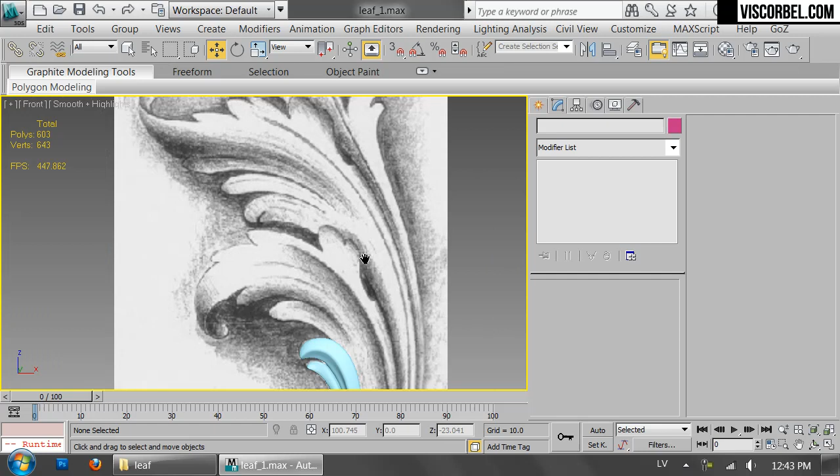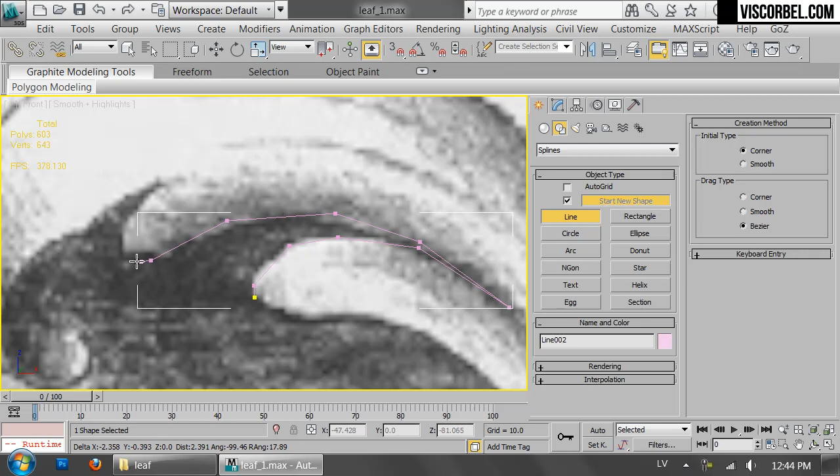Alright, so let's make another leaf, and this time let's make it a bit more complicated. And I'm gonna use the second leaf from the same drawing. Again, I'm gonna begin by outlining with the line tool. Okay, here I'm gonna trace it like this.

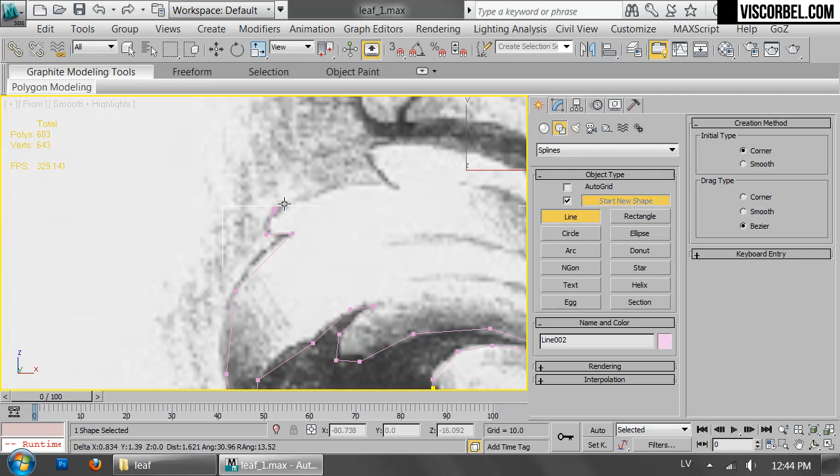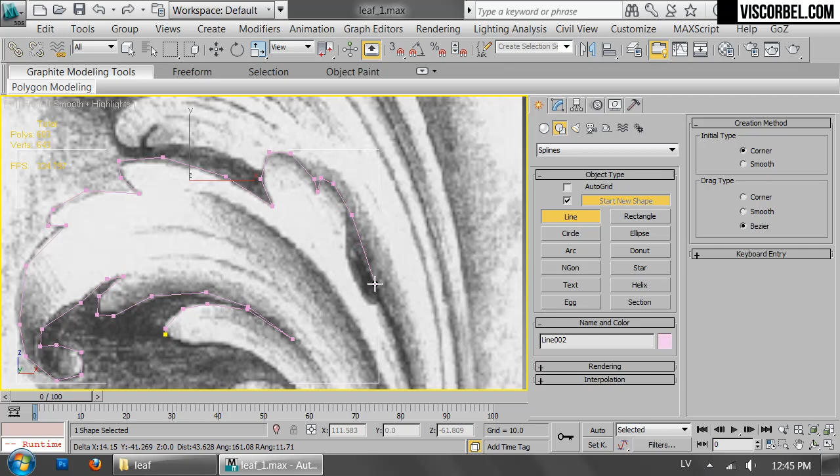Okay, just quickly go over the overall shape. I'm gonna slightly modify it over here. I'm not gonna make such a deep cut. And just a few more.

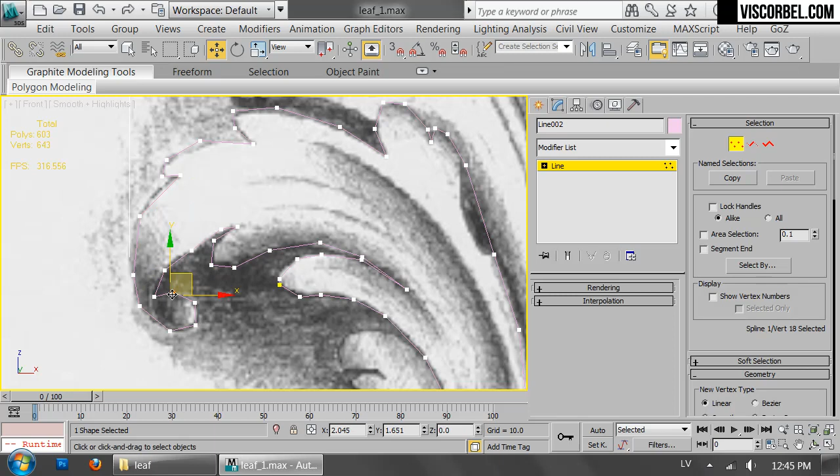Okay, just tweaking the shape to make sure it's nice and smooth. Okay, maybe let's make this part a bit thicker. Like that.

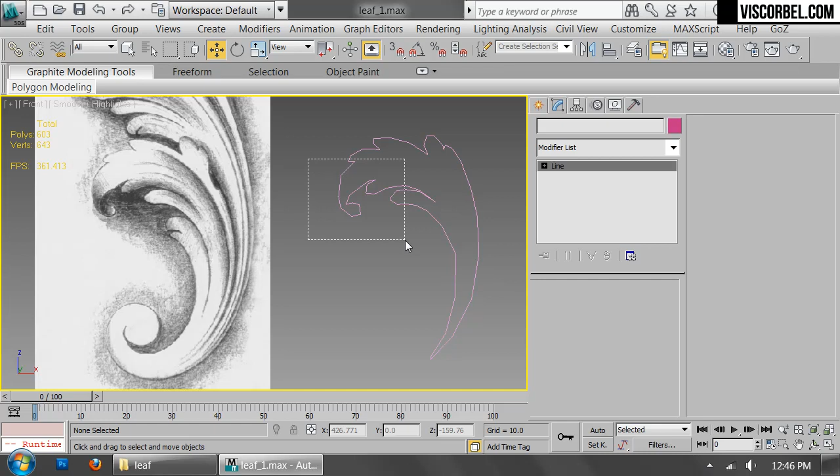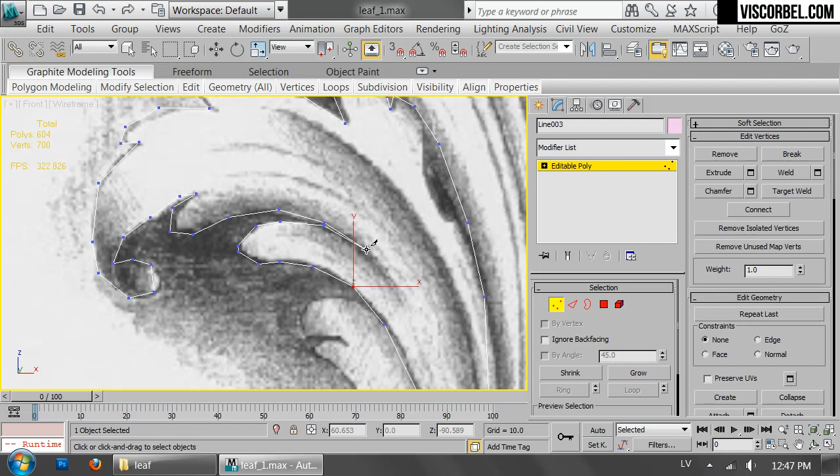Alright, and now we're gonna add the main lines with the cut tool. First, make sure everything is set to corner, collapse to editable poly. And now let's use the cut tool to add in the main lines. The main lines usually follow the major features of the object you're trying to model. So in this case, they follow this curved shape of the leaf.

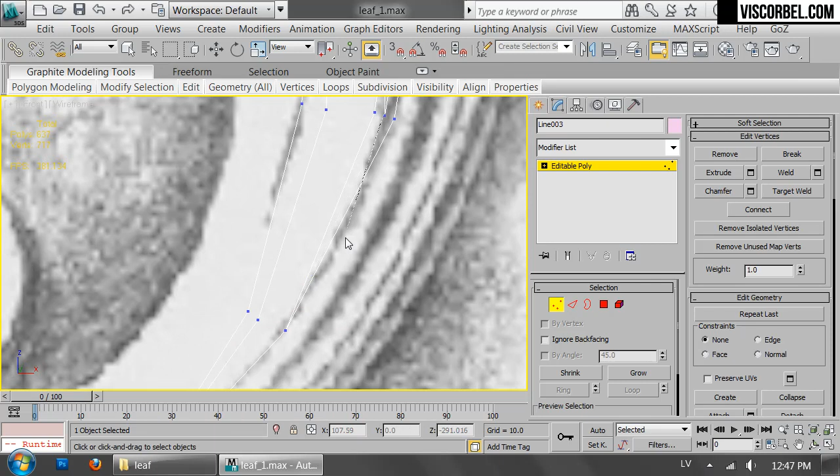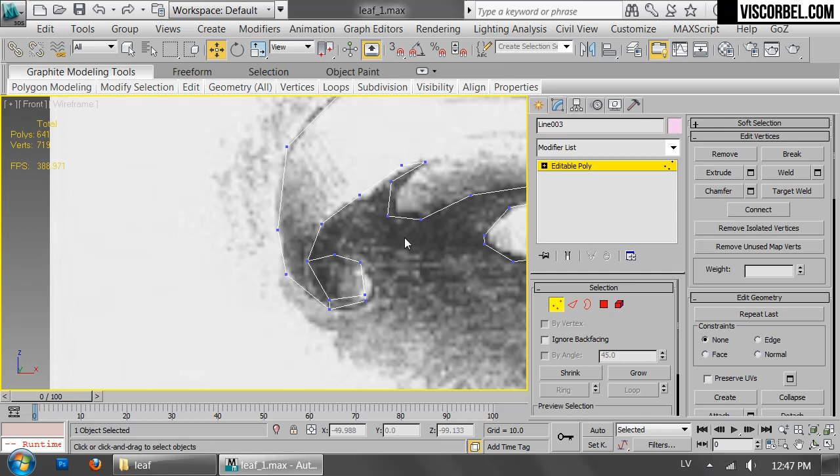Okay. Let's connect these two. And let's cut in some more detail.

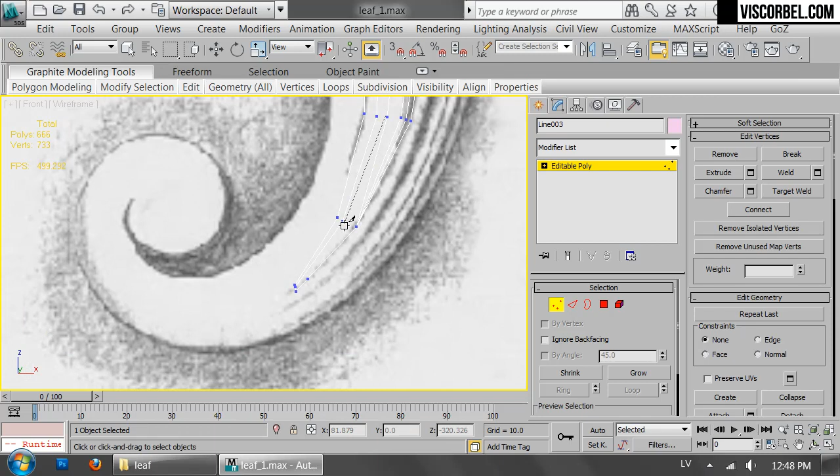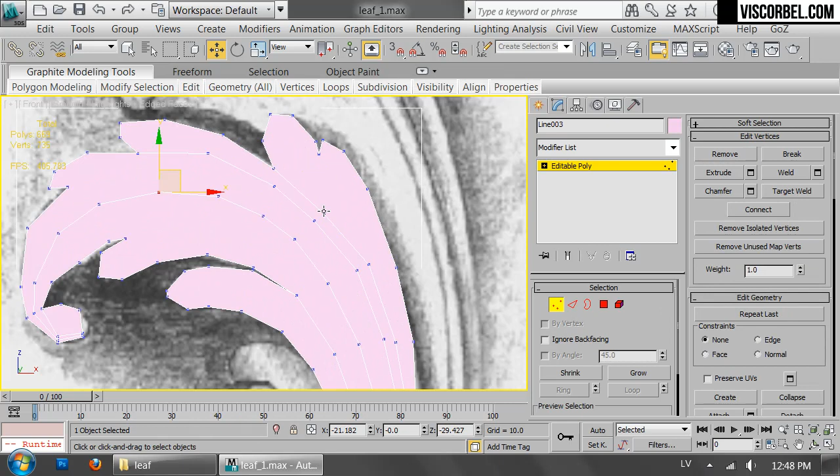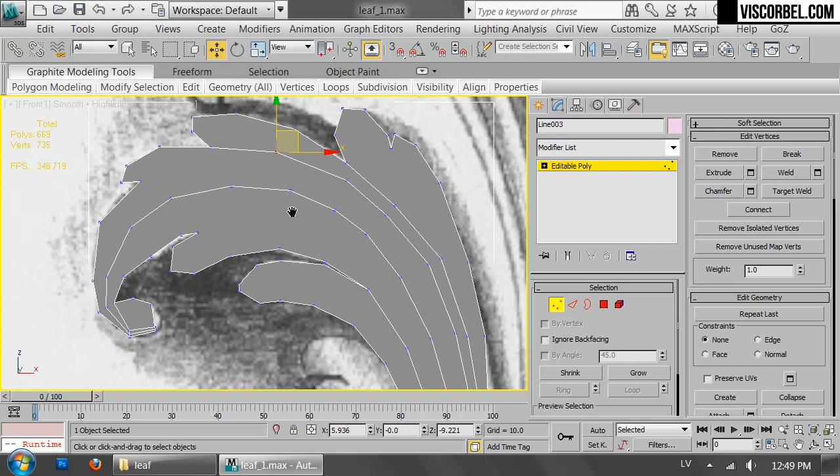The pink color makes it a bit difficult to see the edges, so I'm gonna assign a different material; I like using dark gray. Like this, and I find it's much easier to see where the edges are and the overall grid. Right, let's cut in some more main lines. Let's end this with a triangle.

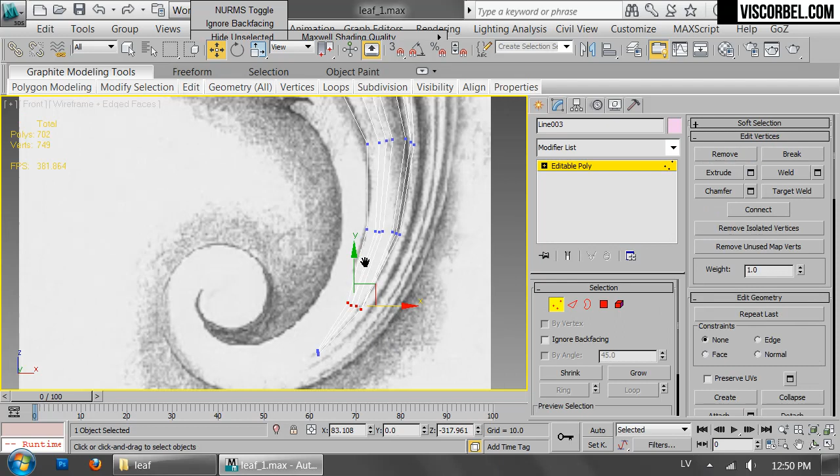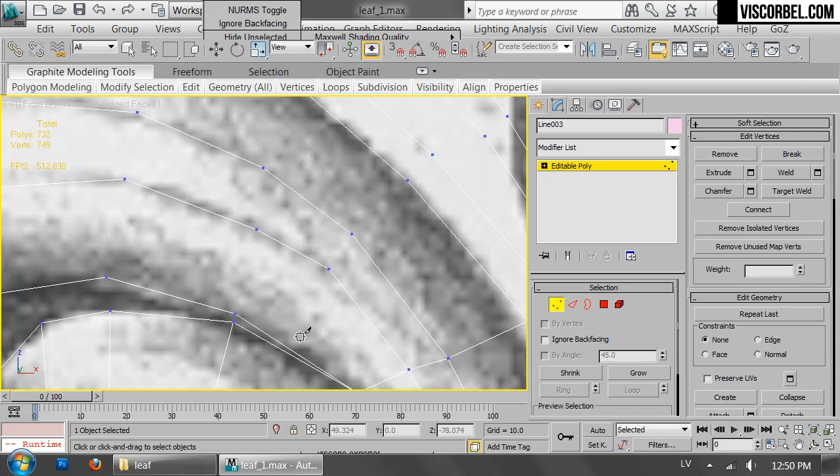Okay, now I'm going to use the connect tool to quickly connect these vertices. I'm just using a shortcut for that now. It's much faster than going through the menu all the time. Okay, looks like we need to cut in one more edge here, just so we have somewhere to complete our edge loop.

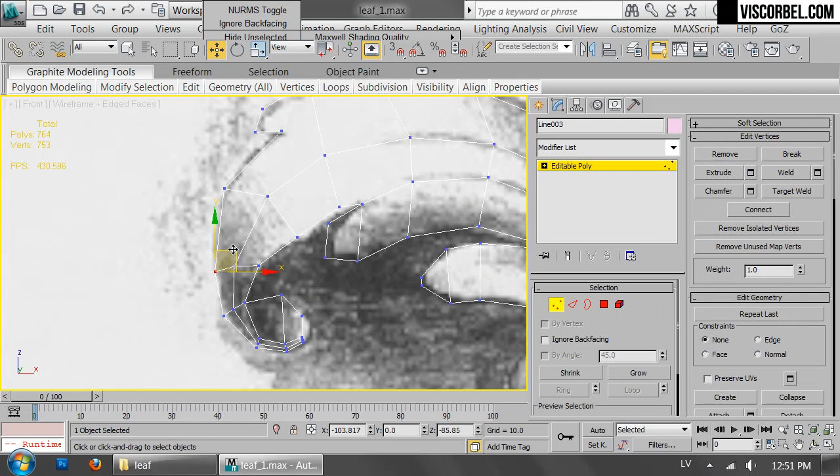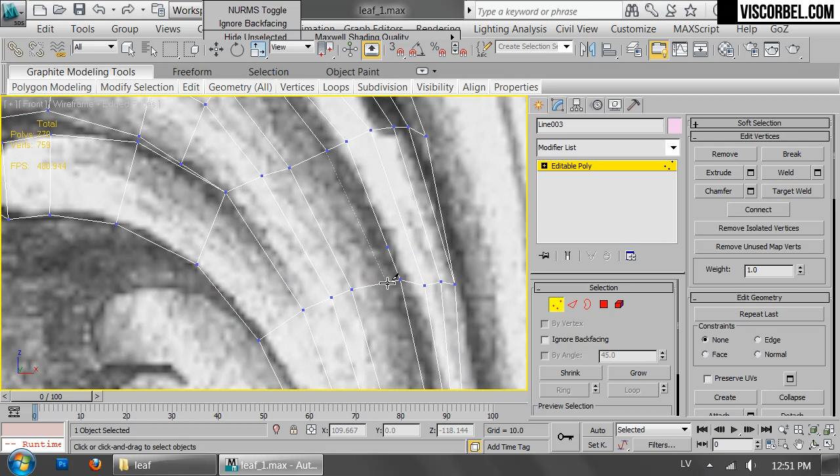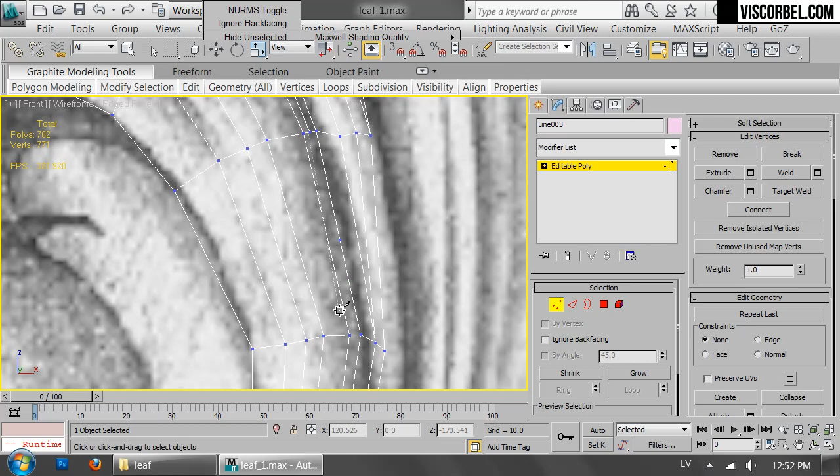All right. Some unfinished parts over here. Let's bring this all the way to the end. And one more cut here.

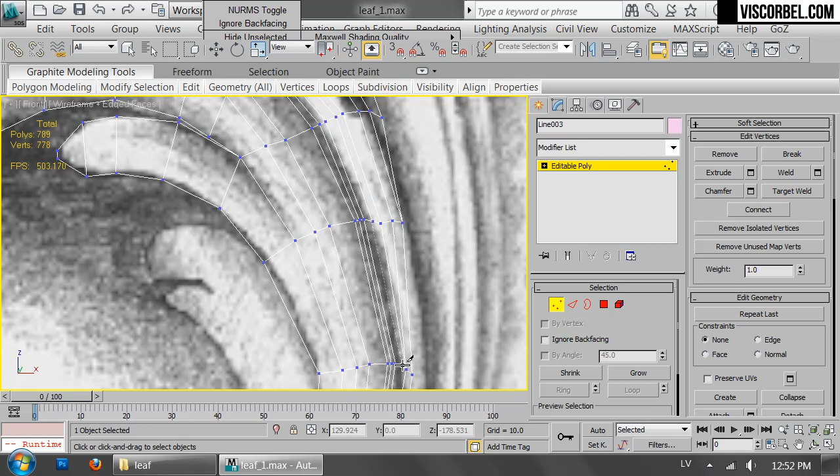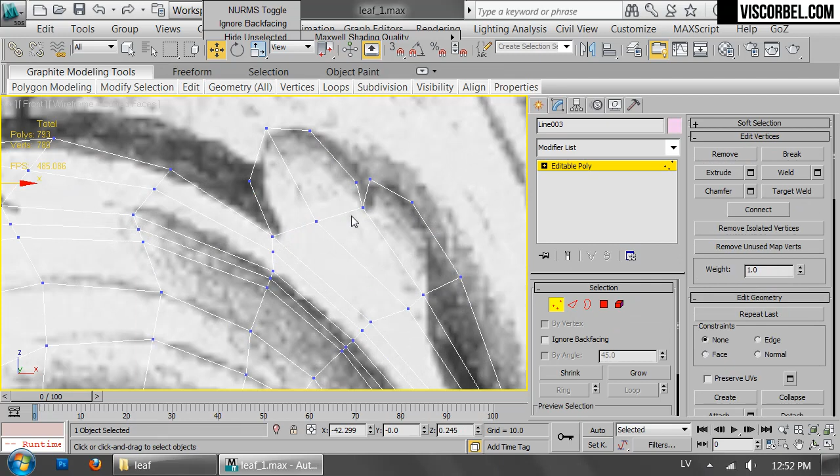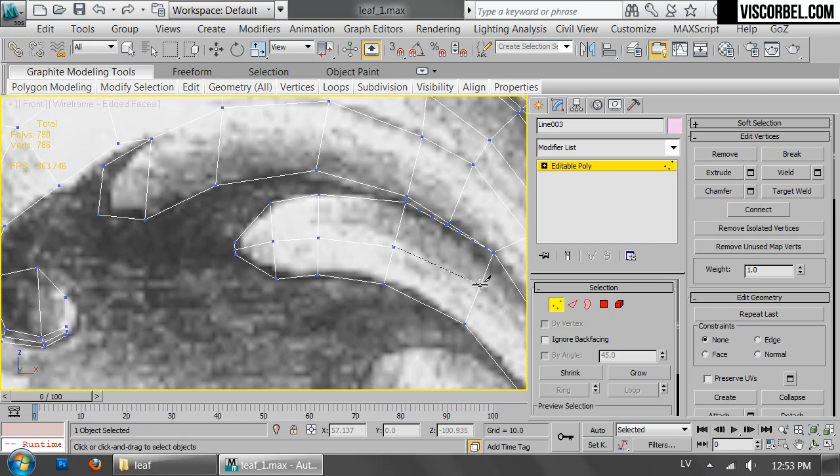And now we can probably start trying to make the shape in 3D. Right, I'm just gonna add one more cut. I want to make sure there's enough detail for creating the 3D shape. If there's not enough edges, it can be quite difficult. Okay, so that's our base mesh.

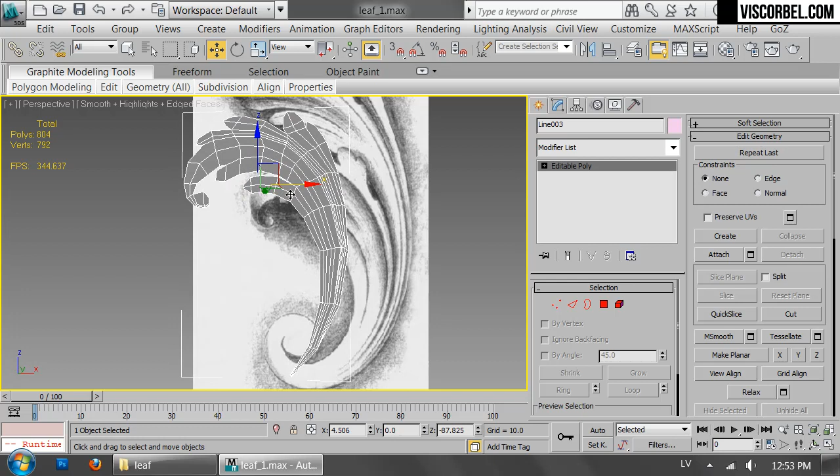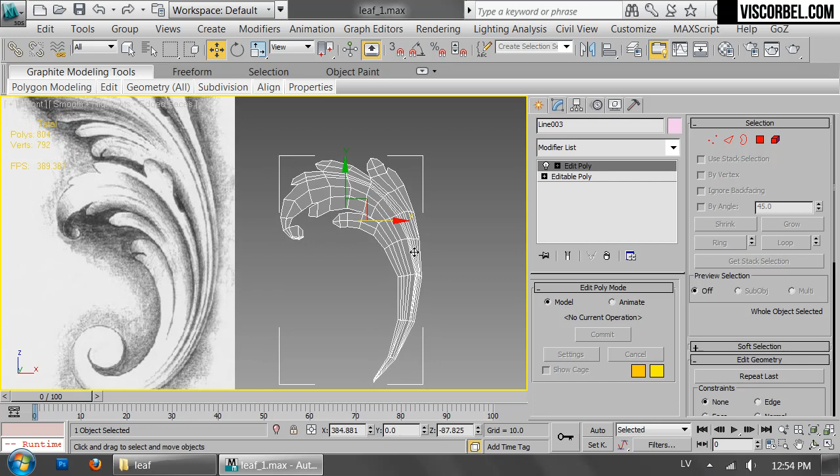I'm gonna edit poly it so I don't mess anything up, and I'm gonna try to modify it. Okay, let's move it out of the way of our reference image. Looks like this part is a bit higher than the rest of the object. So I'm going to try and extrude it out.

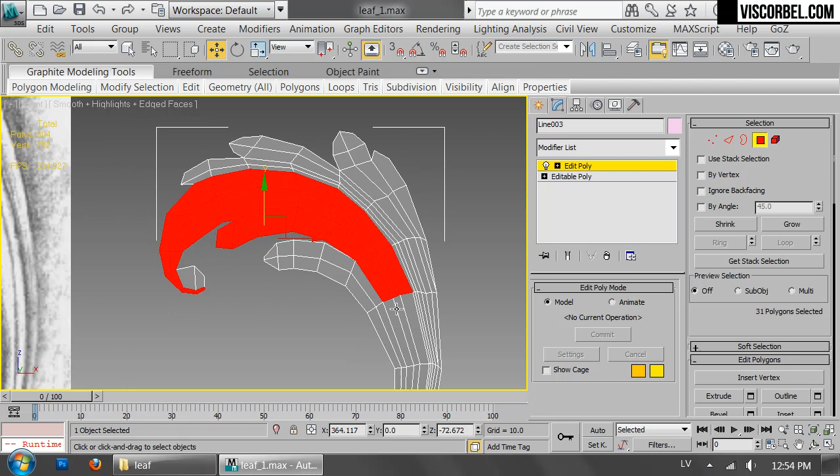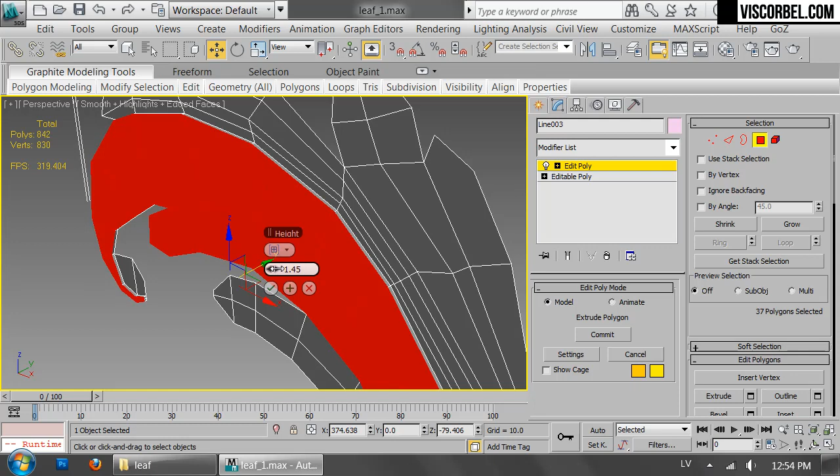Alright, maybe up to this point here, maybe even a bit less. Okay, up to here. So let's extrude it out a bit. Maybe 2 times to make a sharp crease at the start. Make a smoother transition over here at the tip.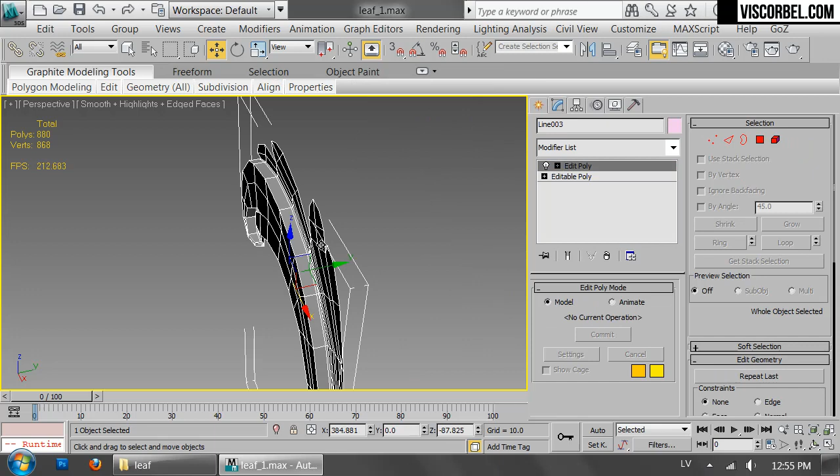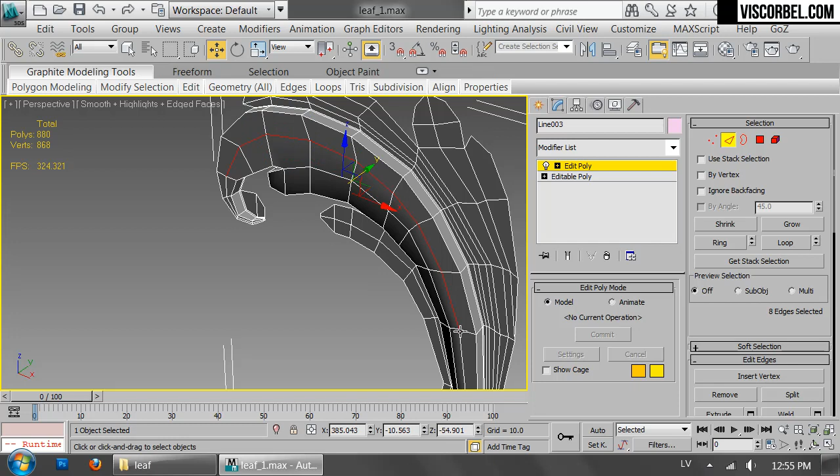And maybe move some of the edges to modify the shape a bit. Let's move these inwards. I'm gonna select this edge loop and I'm gonna move it outwards a bit. So the result is something like this.

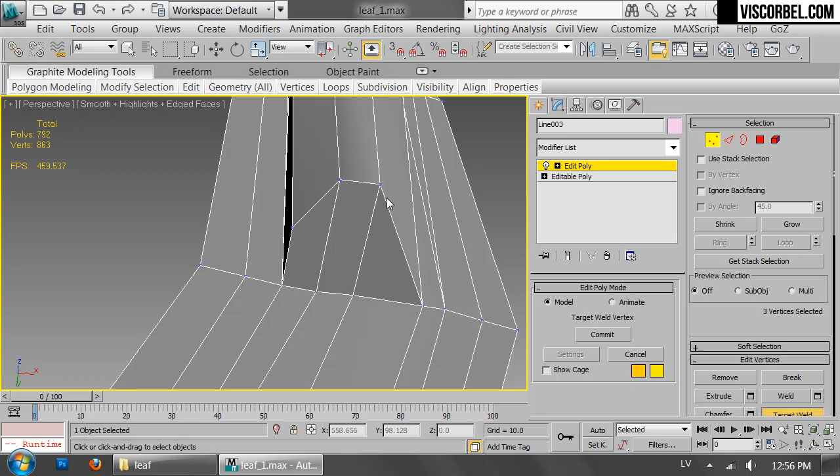Okay, we want to make sure this part ends nice and smooth. So we're gonna target weld all these vertices down here to make the transition to the extruded part very smooth and gradual. Alright. And move these vertices as well, so it's nice and smooth.

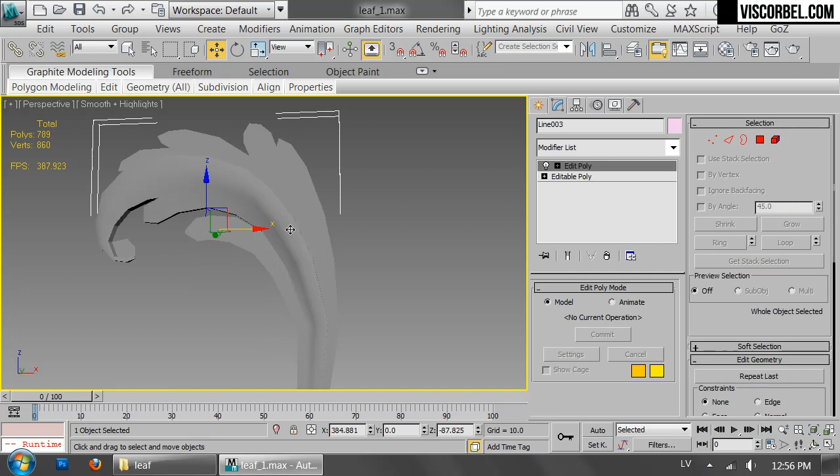Okay, let's add some more detail. I'm gonna move these edges outwards a bit.

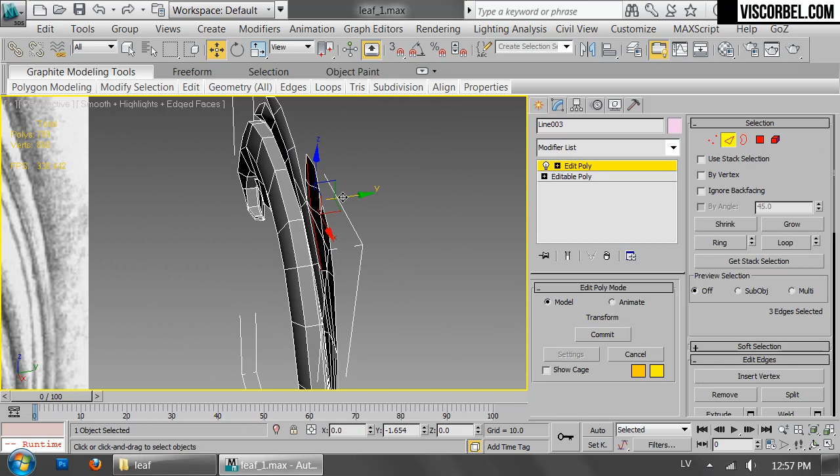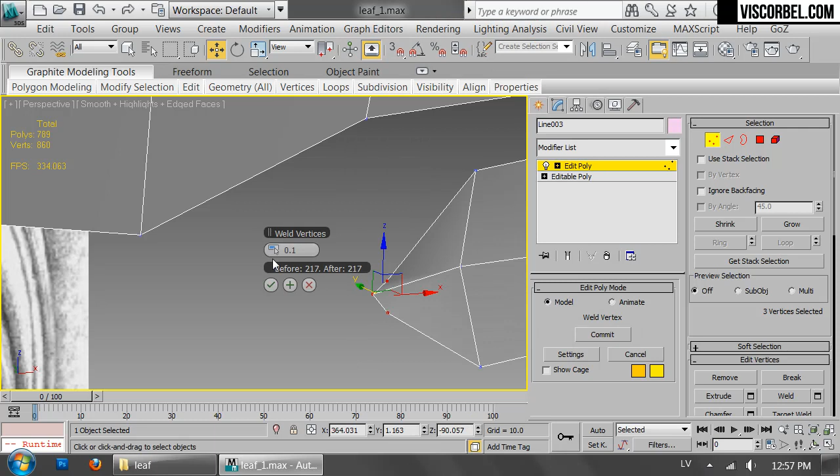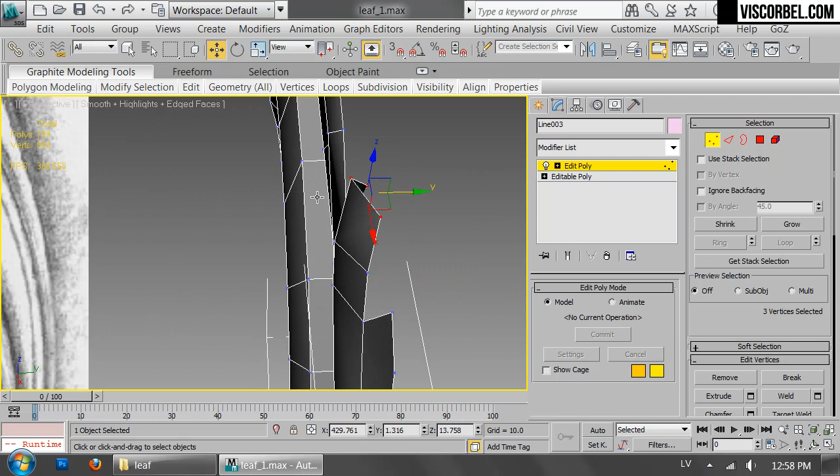And move these ones inwards to make an inwards curve or a concave curve. Actually, I think we can just weld these 3 points together. Okay, let's move these edges back a little bit. I'm trying to make it a bit more 3-dimensional by tweaking the vertices.

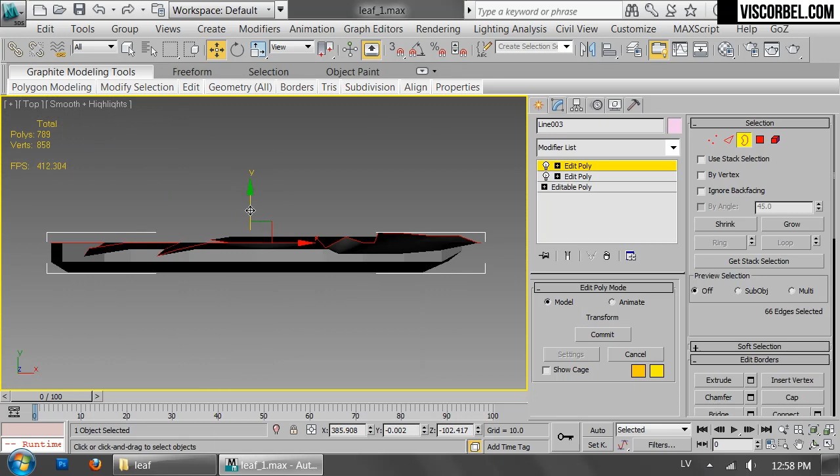Right, I want to see how it looks with Turbo Smooth. So first I'm gonna add another edit poly and extrude the outline backwards. Okay, first a little bit to make this edge a bit sharper, and then a bit more, and flatten it on the y-axis. Turbo Smooth, check the results. It's pretty decent except for this part over here.

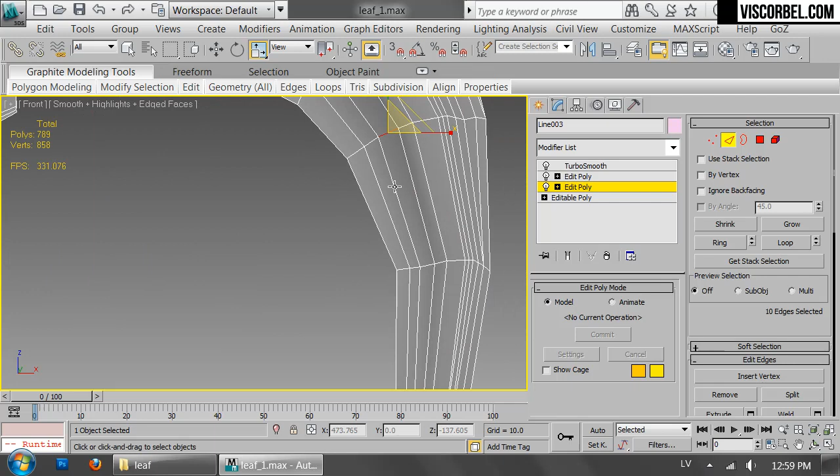Looks like we need to add more detail. And I'm gonna connect and move the resulting edge loop inwards. Maybe sharpen this part a bit by moving some vertices. Okay, not enough detail here. Let's connect. Okay, like that. That's a pretty decent result.

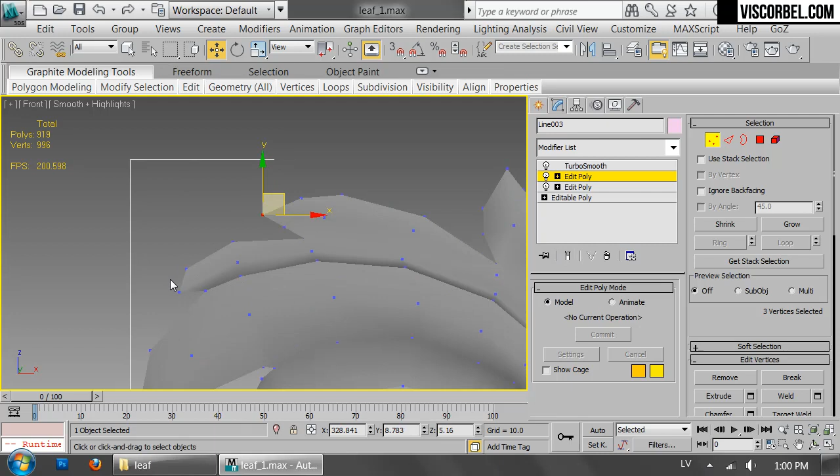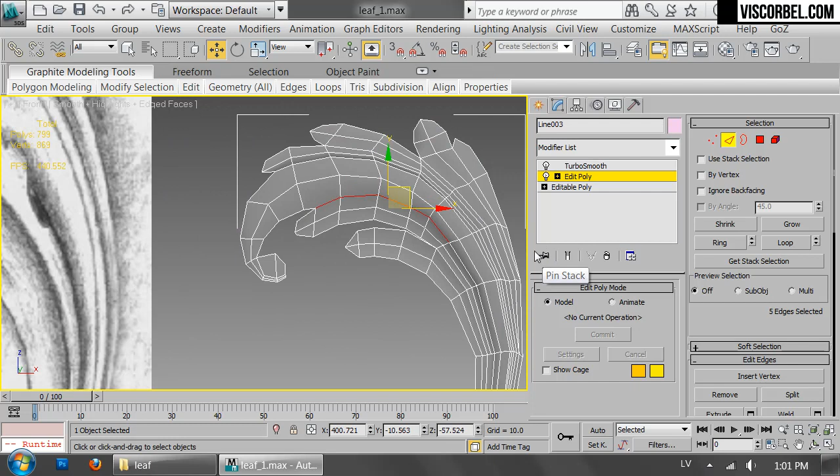Okay, so it's not perfect, but you get the general idea. I think I want to add a crease over here. So what I'm going to do is I'm just going to select these edges and I'm going to extrude them inwards. Okay, just a tiny bit with small width.

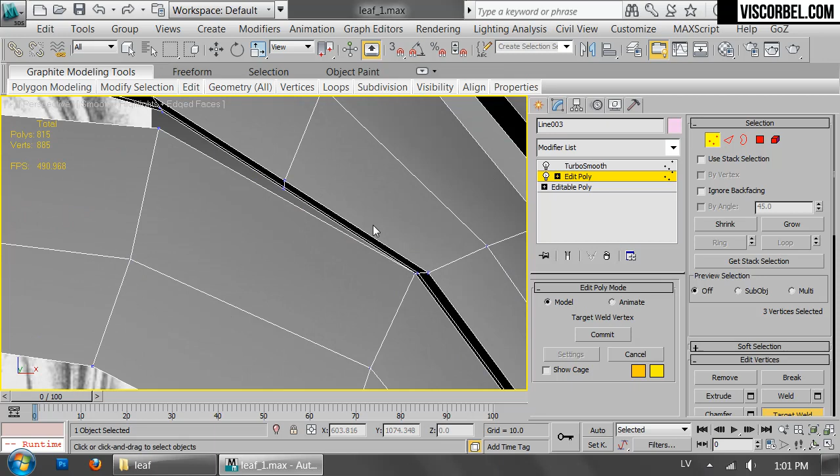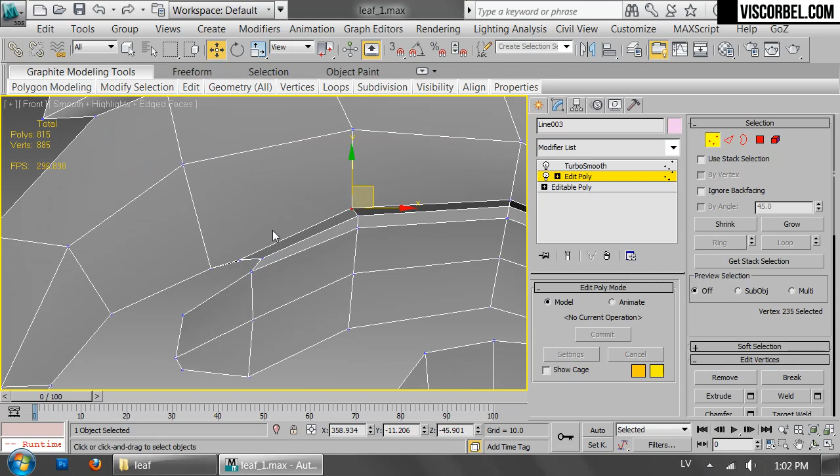And target weld to get rid of the triangles here. And target weld on this end to make the transition a bit more gradual. Okay, and you can also smooth these to taper the transition a bit. Okay, and we have a crease there.

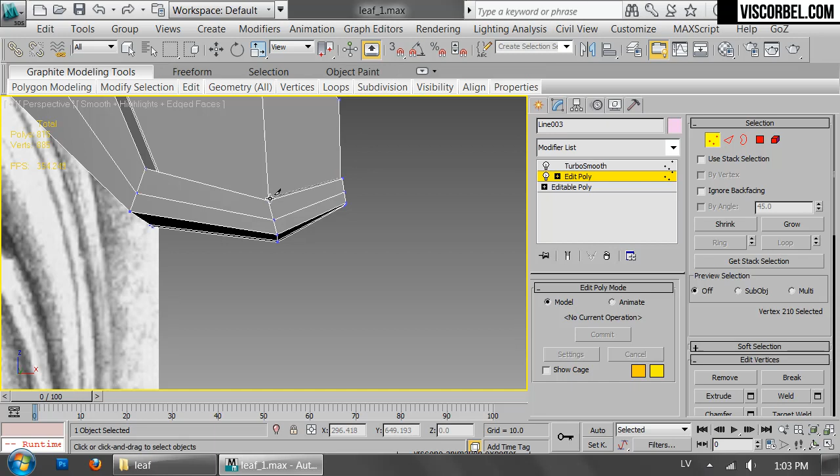And I also want to make a crease over here. So I'm going to select this edge loop. Actually, I'm just going to cut in some details manually. Chamfer will not work correctly in this case. So I'm just going to cut some edges close to the edge I want to make a bit sharper.

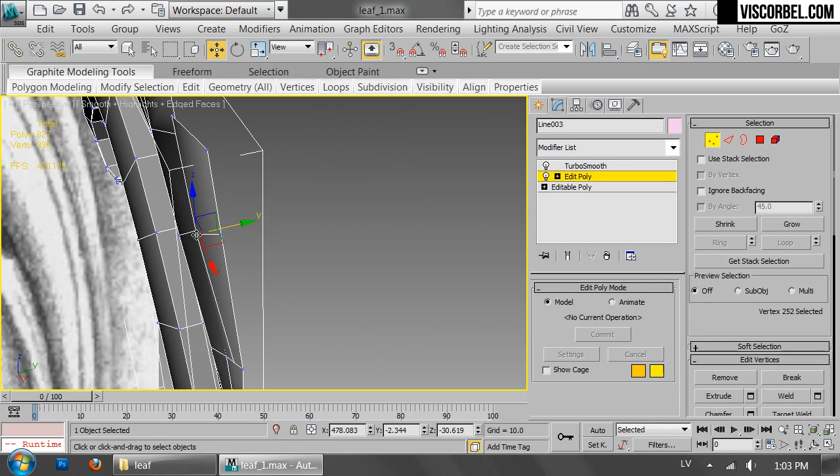Let's see what happened. And it's a bit better. I think that's going to be fine. Okay, let's add some edges over here. And finally, let's extrude again to finish up the subject.

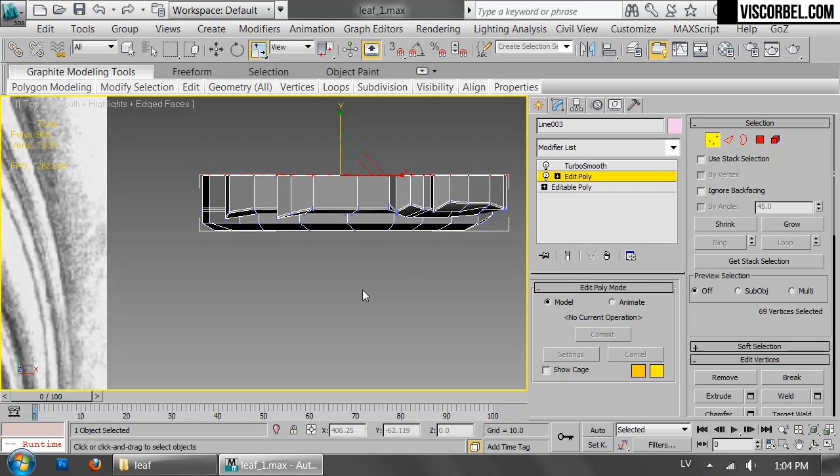And that's a quite nice looking leaf you can use for many different ornaments. I'm just going to throw on the Cap Holes modifier to close the gap on the back. And you want to make these subjects with enough detail so that they look good with just one iteration of

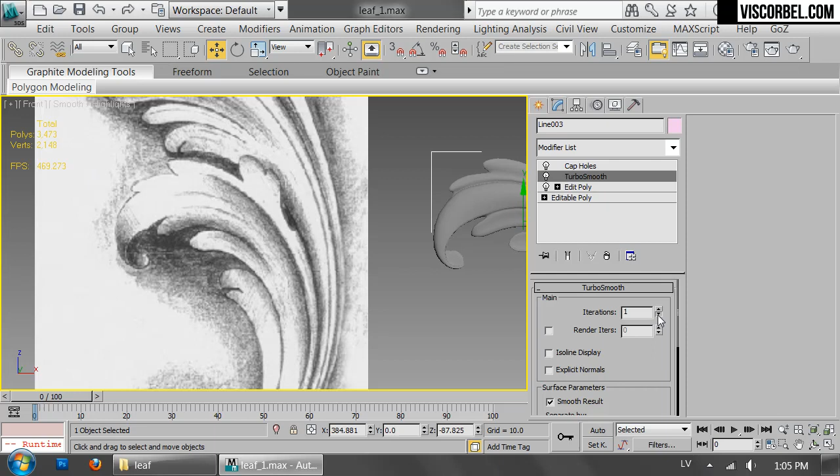Turbo Smooth. And if you add another iteration of Turbo Smooth, it's going to quadruple the number of polys, and that's really not the thing we want if we have hundreds of these little leaves in the ornament. So make sure you make it so it can work with just one iteration of Turbo Smooth.